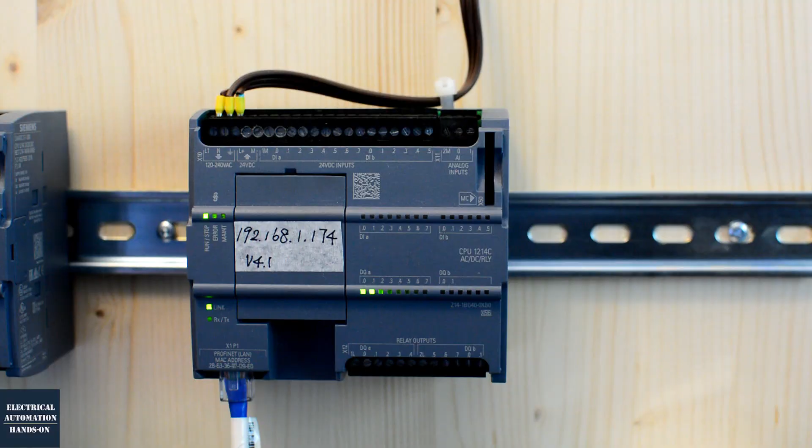In this video, I'm using the Siemens S7-1200, CPU 1214C AC/DC relay. This is a very commonly used controller, especially at the machine level. I will show how we can use this SD card to deliver the new program, so the end user, as a machine user, just needs to plug in this card so the new program can be delivered to the controller.

Let's first review the TIA Portal. Let's quickly review the current logic inside, and then I'll play the role of the machine builder, machine programmer, and add some features and transfer my program to the SD card. Then I'll mail this SD card to the machine user. As a machine user operator, he just needs to plug in this card, and I will show this procedure. Now let's go to the TIA Portal.

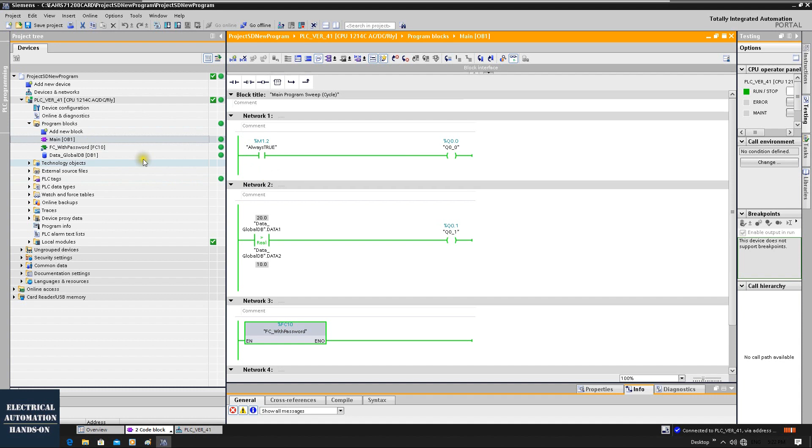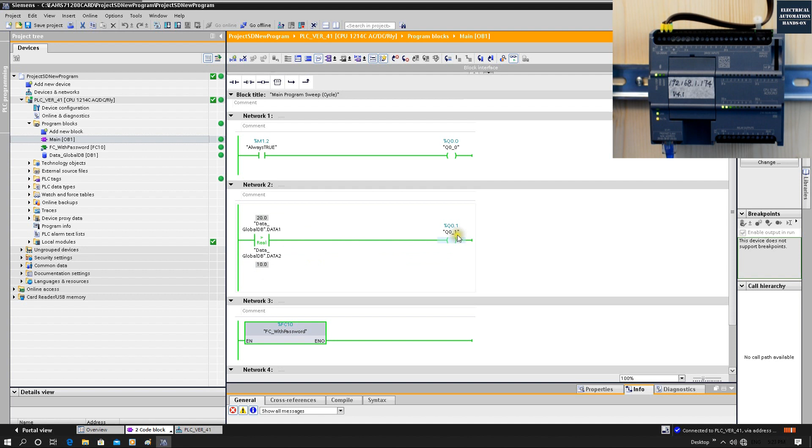Let's quickly review the existing program in this PLC now. In this program, I have two logic blocks. One controls the first output Q0.0, always on. The other logic controls the second output, Q0.1. Here there's a comparison logic: 20 greater than 10, which controls turning on Q0.1. These two data values come from the data DB.

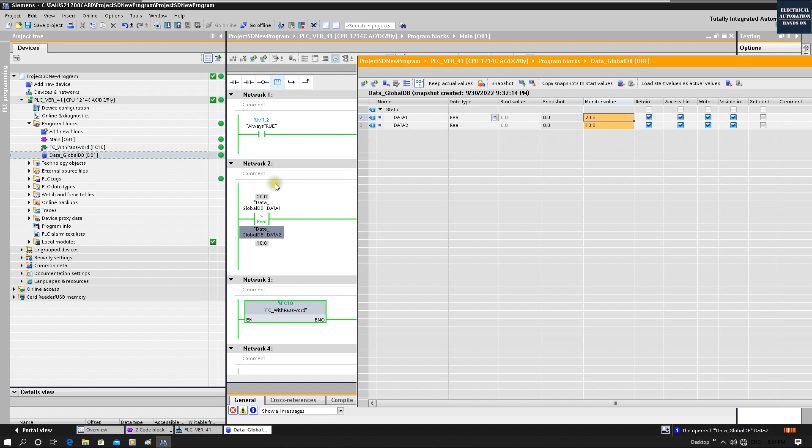Once we open this DB, we can see the current data. Data 1 is 20, and data 2 is 10. Both data are set to retain, so if I shut down the power, this data will not be lost because it's set to retain. Because of this comparison logic, the second output is on, which we can see from the camera. Also, this OB1 is calling an FC logic block, and this FC has a password.

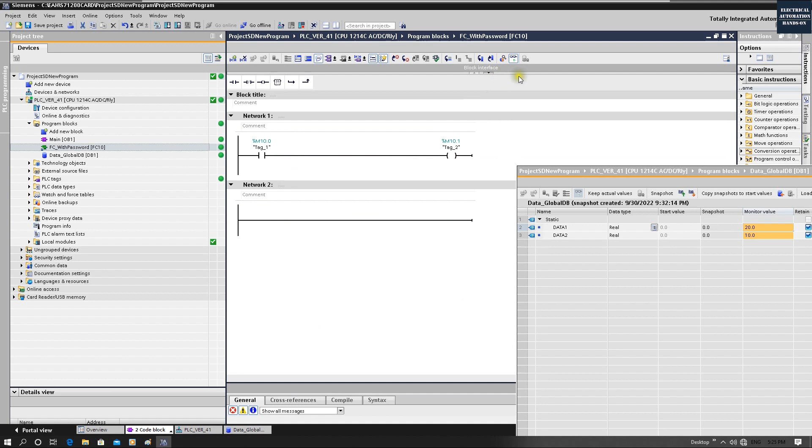I will explain later why I'm using this FC with a password. Now if I try to open this FC, it requires a password - my password is 1. Once I type in the password, we can jump into the program and go online. I believe this is a common case - usually in your program, some function block or function has a password, and the PLC has data along with some function or function block that's password protected.

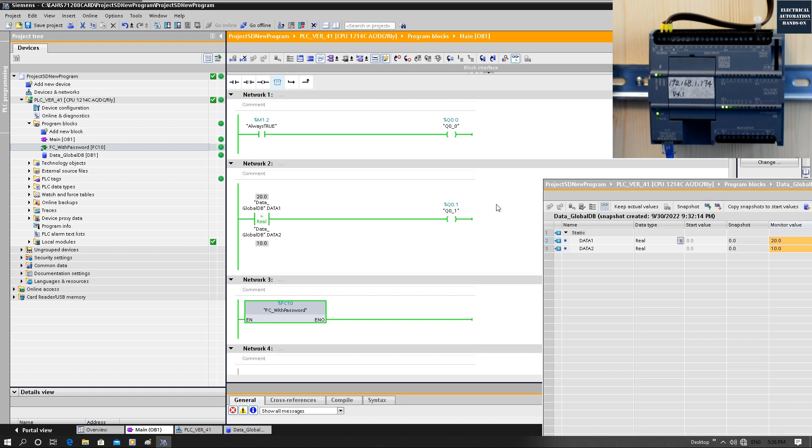Now let's go back to this case. The customer wants to add some logic or feature to this program. For example, I have the original program now, and I'm going to add some new features.

To use this card to deliver our program, a very important setting from the PLC CPU properties. We need to change one setting here. Double click the CPU and find out the startup.

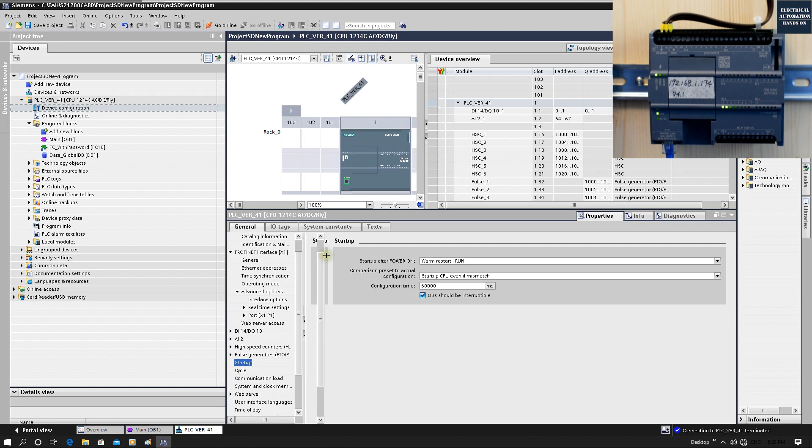The default setting is the warm restart mode before power off. To use the card to deliver the program, we need to select warm restart - RUN. By default this is the selection. That means if the CPU was on status, if we shut down the power, the CPU restarts, then it will return to the original, the previous status.

If it was run mode, after the restart it will go to the run mode. However, if by some reason the CPU was stopped, even if you cycle power, the CPU will not turn to run because it just goes to the mode before power off.

Before the power off, if the CPU was stopped, then your CPU is still at the stop mode. This will be a very annoying status, so your CPU will not be able to run unless you use your TIA portal to connect to the controller and turn on your controller.

Or you can use your automation tool, another software from Siemens, so you can connect to the controller and turn it on. We know the Siemens S7-1200 PLC doesn't have a switch. You can turn on the controller from the stop mode to the run mode.

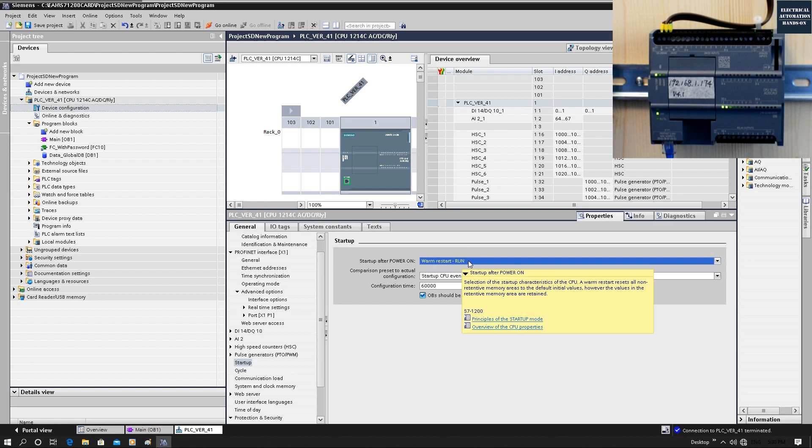This is slightly annoying. So to allow this CPU to force turn to the run mode, we need to select this mode, warm restart run. Keep in mind, you need to select this mode, warm restart run. Okay, and then let's go to the program.

Let me add some program. So the existing program, we have the data here. It turns on Q0.0 and turns on Q0.1. I'm going to add another program, say in the DB here.

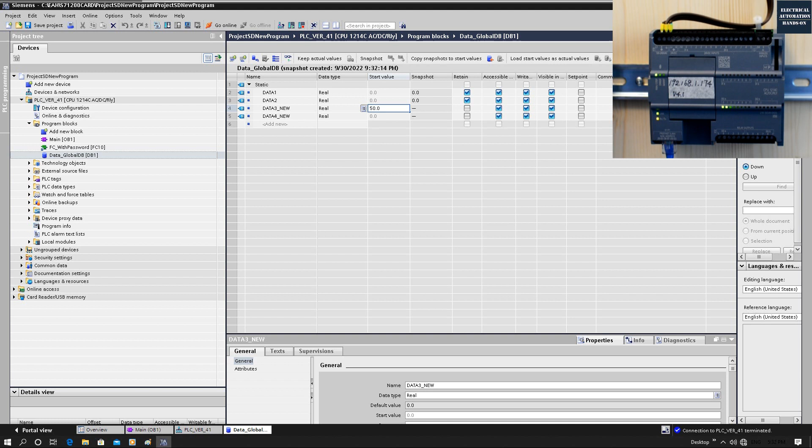I need to add some new feature. For example, I have the DB data 3. This is the new real, and the DB and data 4, this is also new. And their start data I can set 50 and 40. Also I can turn on the retain.

And from this logic I can also use the comparison, greater compare, if data 3 greater than data 4, then we can turn on Q0.7. And I can add a comment here. This is the new program.

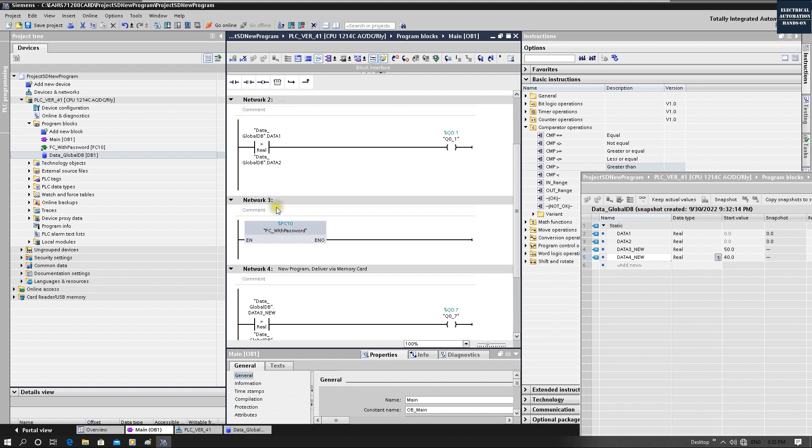This is the new program that needs to be delivered via the memory card. So I've added this program now. So how can we use the card to deliver this program?

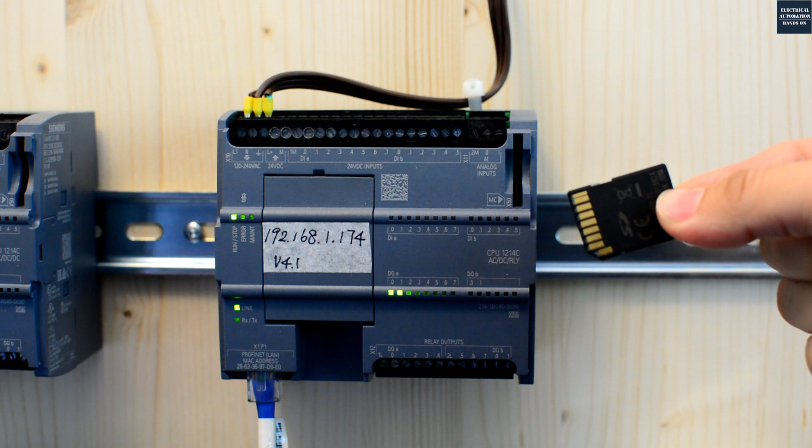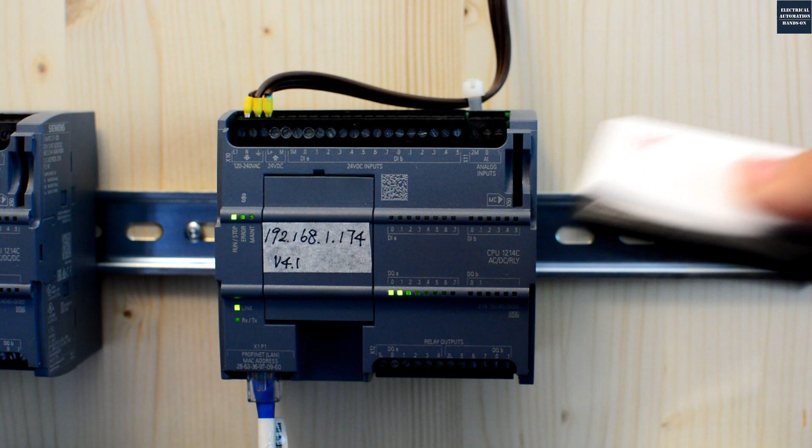This is a Siemens memory card. This is a very common style, quite similar to a camera or any other SD card. You can use this common SD card reader to read this memory card. Basically every laptop now has an SD card reader, you just need to plug it into your laptop.

And now I'm going to plug this card into my laptop, and we can use the TIA portal to transfer my program into this card. For example, this is my laptop. At the side of my laptop here it has this card reader, so I can plug in this Siemens card.

Once we plug in this memory card, from the Windows system we can see it finds this card, and the size is 4 MB. Even though the total shown is 32, the actual size for this memory card is 4 MB. This is enough for most cases for the S7-1200 PLC.

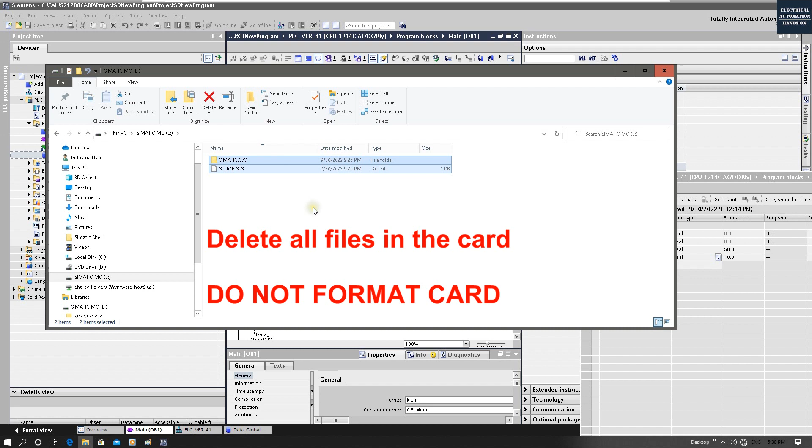So we double click into this memory card. Maybe in this memory card it has something inside, but it doesn't matter. The first thing we need to do is delete all the files in this card. Take care of this word - just need to delete, do not format this card. Just delete. So we select all the files, right click, and click delete.

As we know, the Siemens card has a special format. Once you click format, this card will be formatted to a very regular card, and then this card cannot be used as a Siemens card anymore. Be very careful with this. Also, turn off the display of hidden files - do not delete the hidden file, just delete the project file.

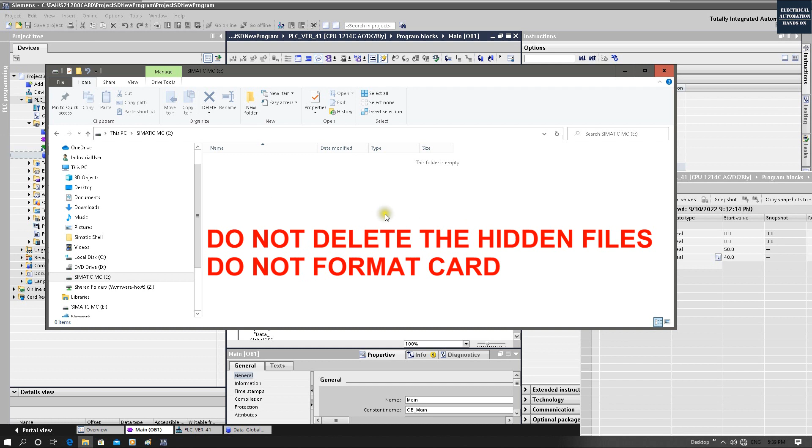And then from the TIA portal, from this left corner, we can expand this card reader here, and we will see this removable device show up, showing this SIMATIC MC. Once we delete all the files in this card, it will be set to an unknown mode. Then we need to manually set the memory card role for this card. Right click, click properties, and select this card type to transfer.

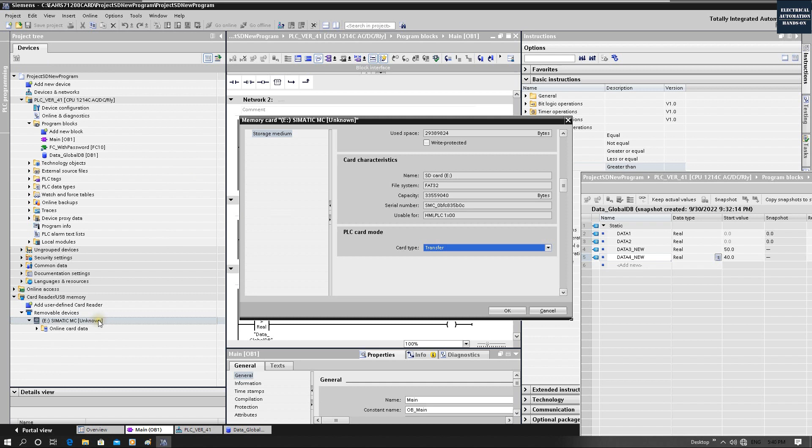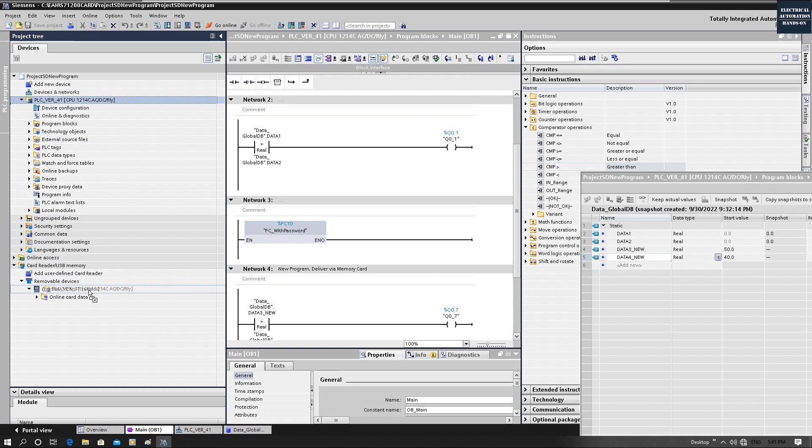Because we are going to use this card as a transfer card, we will copy our program to this card and mail this card to the customer. Click OK, and after selecting, we will see this role change to transfer. After this setting, we will click this entire project here and drag this project to the card, see this plus icon, and release. Okay, click download.

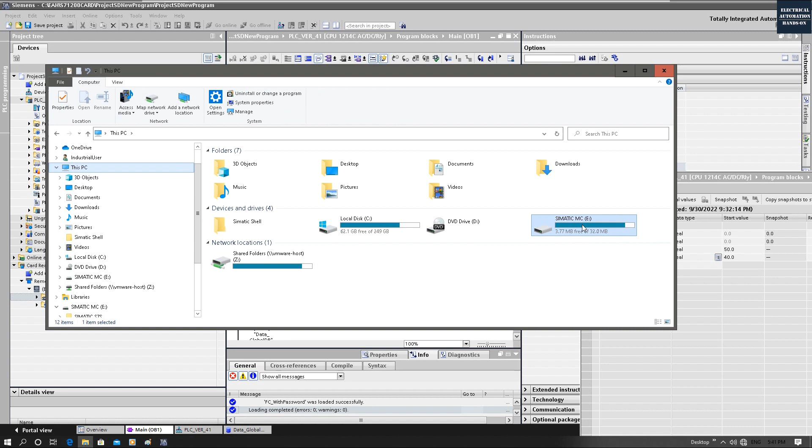Alright, now we transfer this project to this card. In the meantime, we can open this SIMATIC card, and we will see some S7 files transferred into this card.

Okay, now we can unplug this card and mail it. This card has the new program. We will mail this card to the customer. Now the end user, the machine operator or maintenance person, receives this card.

So we can insert this card into the controller. Before we insert this card, we need to shut down the power for this controller. Now let's shut down the power.

Okay, we shut down the power, and now I'm going to insert the card towards the top. There's a Siemens symbol here, so it's facing the left side, then let's insert. Make sure that it's plugged in. The surface is flat. Make sure the card is inserted correctly.

And now we can turn on the power. In the meantime, let's see the status of this controller. Okay, let's power up.

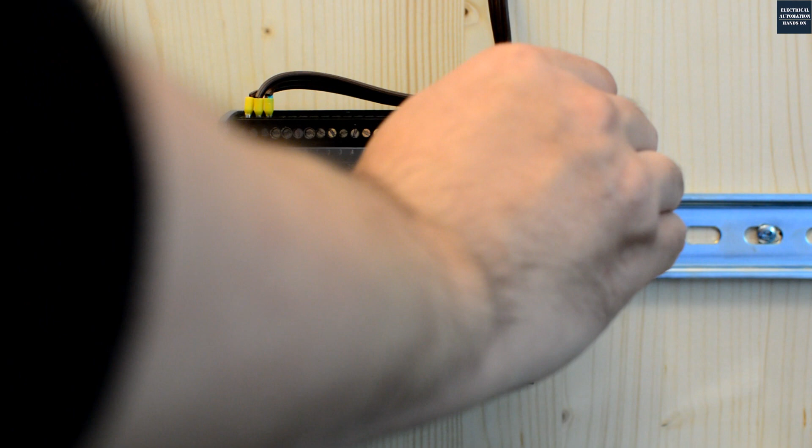Alright, once you see this stop indicator solid on and the maintenance indicator flashing, we can turn off the power. Okay, we turn off the power and then we need to unplug this card.

And now let's turn on the power. To verify if the new program was delivered to this controller, we will see this output Q0.7, which needs to be on.

Alright, so we will see Q0.7 turn on. That means the new program has been delivered to this controller. But in the meantime, you will see a little bit of a weird thing. If you compare the controller before we inserted this card, the second output, Q0.1, was on. But now that turns off. What happened? So let's go to the program.

Now I'm connecting this controller just for analysis, just to troubleshoot why this output turned off. This is a very important case I'd like to show. In a real case, this controller is working on site, and you're not able to connect to it. This is just to show this special case of why the second output, Q0.1, is not on.

So now let's go online. Firstly, we will see after I insert this card and turn on online mode, everywhere shows green. That means the new program was delivered to this CPU. My offline program and this on-site controller, they all match.

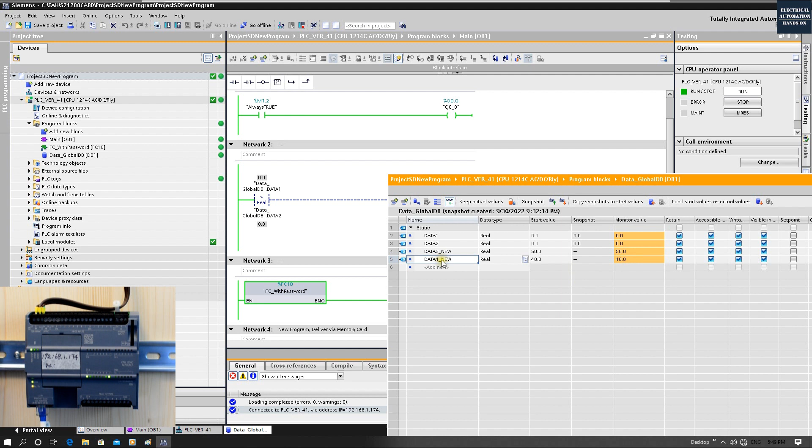And if we now turn on monitoring, we will see data 3 and data 4, this is new data. When I created these two data points, they had a start value, and once we download to this controller, they use 50 and 40 - this is the initial data.

But data 1 and data 2 were working on site, and maybe the customer was using the HMI, setting something already, setting this value to 20, setting this value to 10. So Q0.1 was on. But now, after we deliver this program, these two data get wiped to 0. That's because the start value is 0.

And another key reason: once we deliver this program, even though the value was retained in the PLC, it gets wiped out by this start value. You need to be very careful about this.

Okay, how can we deal with this case? From my personal experience, I would recommend that before you change your program or try to deliver the program using this memory card, you ask your customer to take some pictures from the HMI, or let you know some important values set for this project.

For example, basically all the important data set by the customer will be showing on the HMI, or allow the customer to set something. You could have some DBs store important data, maybe by the start value, the initial value, or maybe set via the on-site setting from the HMI. So you need to ask your customer to take some pictures from the HMI or directly tell you, for example, the PID parameters, temperature settings, some valve settings, or some speed settings. They need to tell you those values.

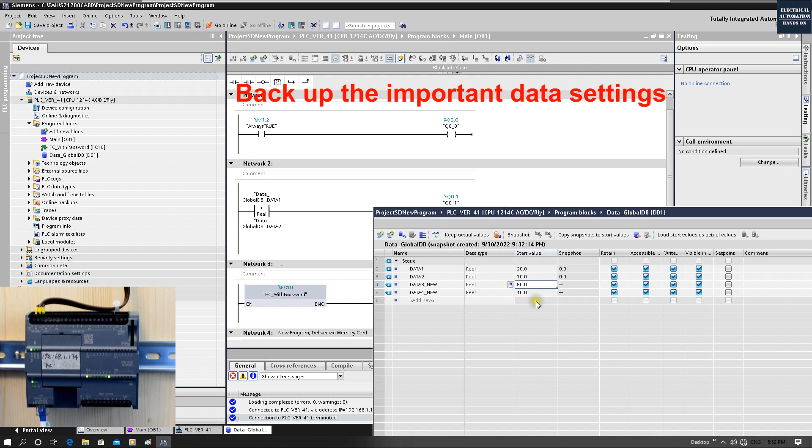And then from this offline, when you're doing the offline program, you need to set something. For example, okay, I know this value was 20, I know this value is 10. Okay, I set those values here as an initial value, as a start value.

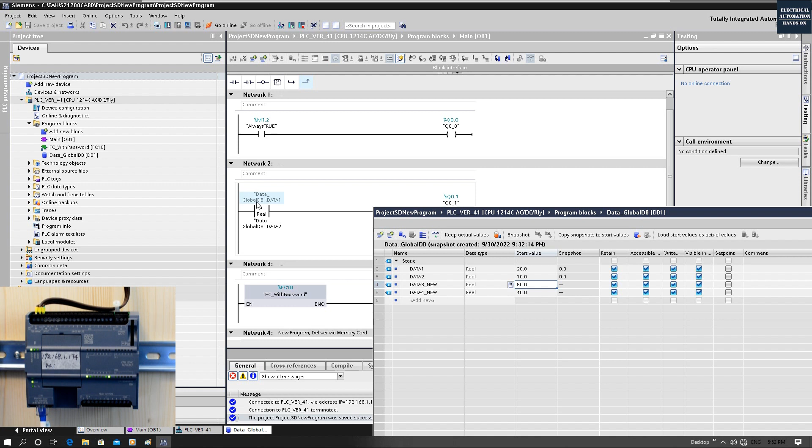Then once I transfer this program to the card and deliver this card to the customer, then once the CPU starts up, this start value will work. So basically this start value is used to initialize this DB. If we deliver the card and insert the card, it will override the real data for your on-site PLC. You need to be very careful in this operation. This is a very key reason I like to show in this video.

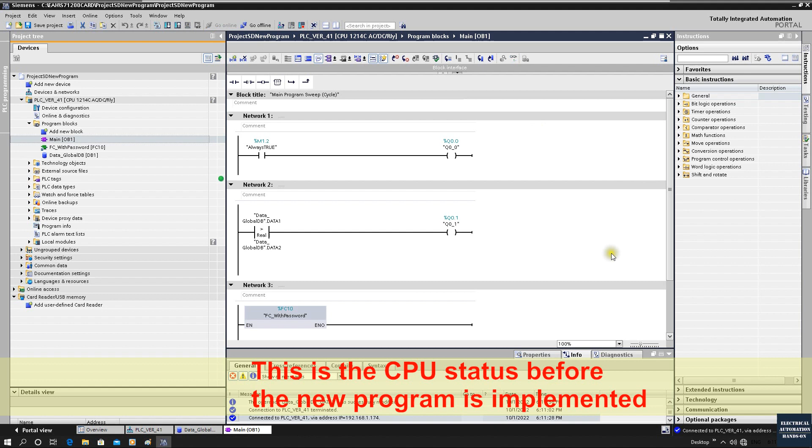Realizing this issue, now I will redo this procedure. Now I return this controller to the status before we download the new program. So now if I go online, in this DB it doesn't have data 3 or 4 new, it only has data 1 or 2. And the current DB value in this controller, that's 20 and 10.

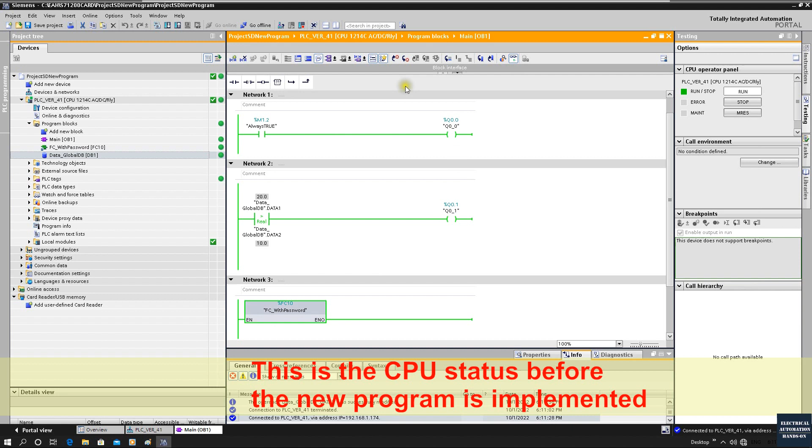And if I go online, as we can see now, the CPU, Q0.0 and Q0.1, is working. So this second output is on. And now I will do this procedure again.

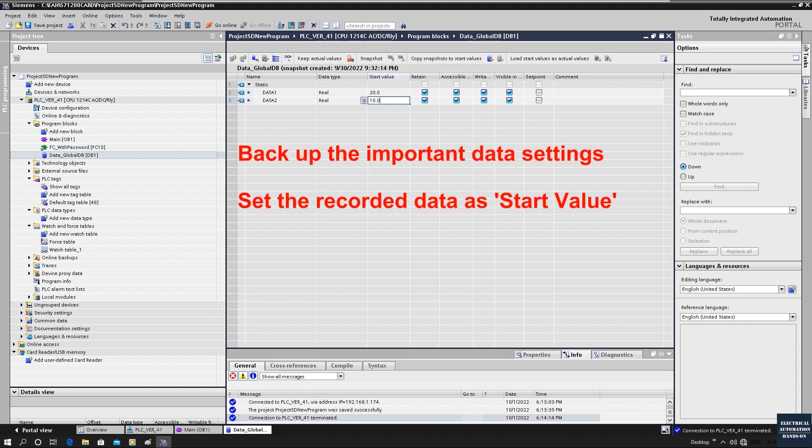Now I'm going to add the new program again. So first let's go to the DB. Before we add a new program, as I discussed, we need to ask the customer to record all the setting data. So in this case, I ask the customer, I know data 1 should be 20, and data 2 should be 10. Okay, I add the value here.

And then I will add the new data for the new program. For example, again, I will add 2 rows here, and name them data 3 new and data 4 new. Okay, and because this is the new data, I will write the start value. For example, this is 50 and this is 40.

And for the setting value, we will also turn on the retain, so once the controller cycles power, the data will not be lost. Okay, and then go to the OB1. I will add the same logic here, and paste the same program.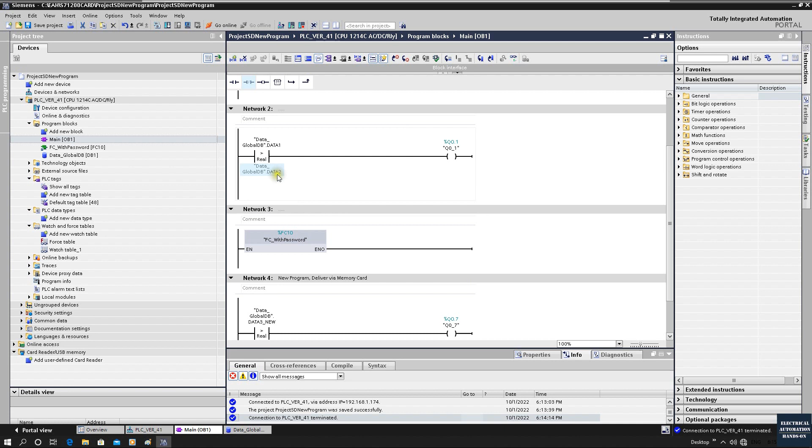So same thing: data 3, data 4. Once data 3 is greater than data 4, it will turn on the 0.7 output. And data 1, data 2, this time we have the initial data setting here, restored from on-site, asked from the customer. So this time the second Q should be on. Okay, save the project now, then compile, and we can copy this program to the memory card.

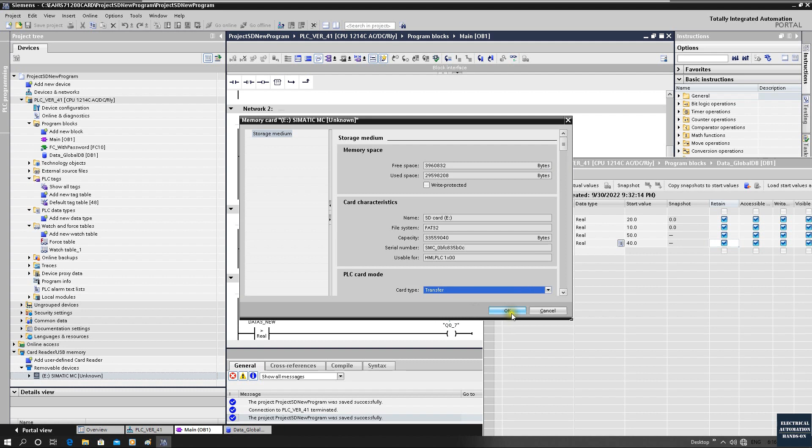Now I'm going to insert the Siemens memory card. Once the memory card pops up, we can delete the existing files in this card. Delete, and then we will see this card transfer to unknown mode. So let's go to the properties, set this card type to transfer. After this, we can compile this project, save this project, and transfer this project to the memory card. Load.

All right, this time this DB has this start value. Let me mail this card to the customer, and once they receive it, they can insert this card. This time we will see these two outputs—this is the controller working on site. As we can see, the first output and second output, this 0.1, that's on, because data 1 that's equal to 20 greater than 10, data 2. That's why the first output is on.

So now this end user received this card. This card has a new program, and also some data has the initial start value. Now I'm going to insert this card to this controller. But before inserting the card, shut down the power. Okay, we shut down the power, and then we insert the card toward the left side, and then let's insert—make sure you can hear this click—and then let's power up.

Okay, it's transferring the program. Once we see this start-stop indicator is solid, and this third indicator, the maintain, is flashing, that means transfer complete.

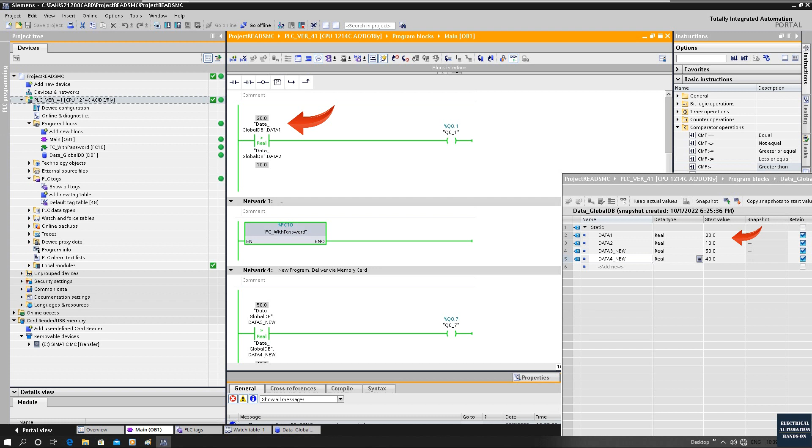We'll see data 1 and data 2 equal 20, greater than 10, and the new data is 50, greater than 40. That's why both outputs are on. So this is using the start value to restore the existing online running data. We need to ask the customer before we insert the card, before we prepare the offline program.

All right, let's shift to the next topic. If you have a higher revision controller, you bought a new one, can this memory card still fit for the new controller? Let's talk about this.

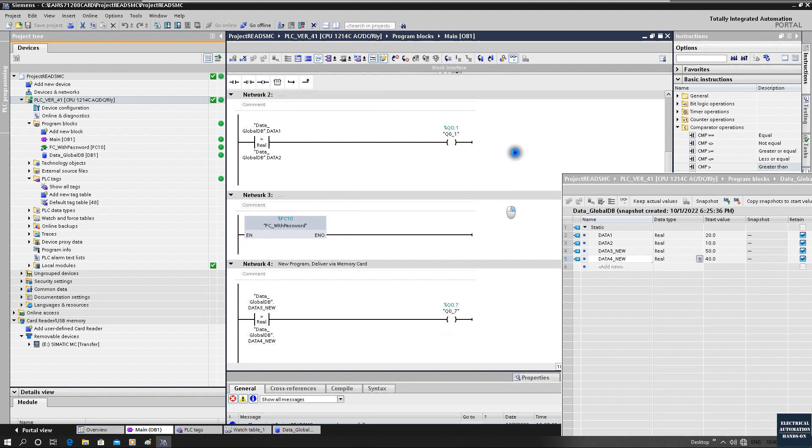As we can see here, on the left side, this CPU represents the controller running on site at the customer's side. Now, maybe for spare purposes, the customer bought a new controller. They ask that this new controller should have the new feature or the same function, but they don't have the program, so they ask you, as a machine builder, to deliver the program to their new controller. But as we know, this controller has an older revision, version 4.1.

But this newly purchased one has new firmware, version 4.5. So if our card still stores the old firmware configuration, but we insert this card directly into this new firmware CPU, can this new CPU directly use the card's existing old configuration?

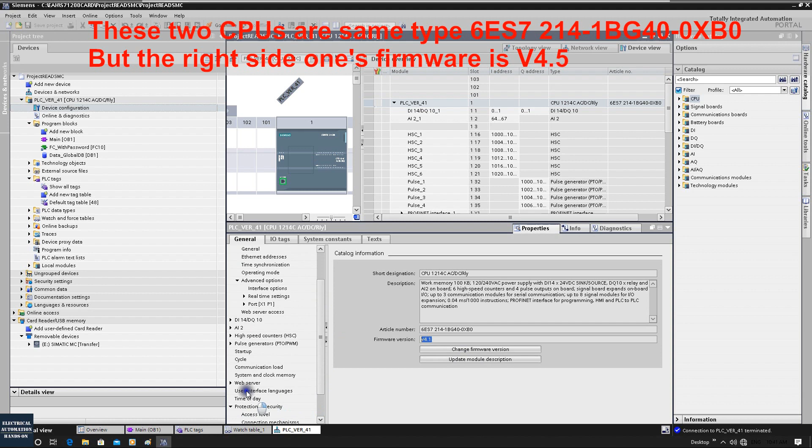Let's try this. First, make sure this selection still selects warm restart run, okay? And if we go to the catalog information, we'll see the offline hardware configuration is still 4.1. Meanwhile, this controller also has a password. If we go to this protection setting, we'll see it's set to no access, and I have a password for this controller. This is basically the common case for the machine builder.

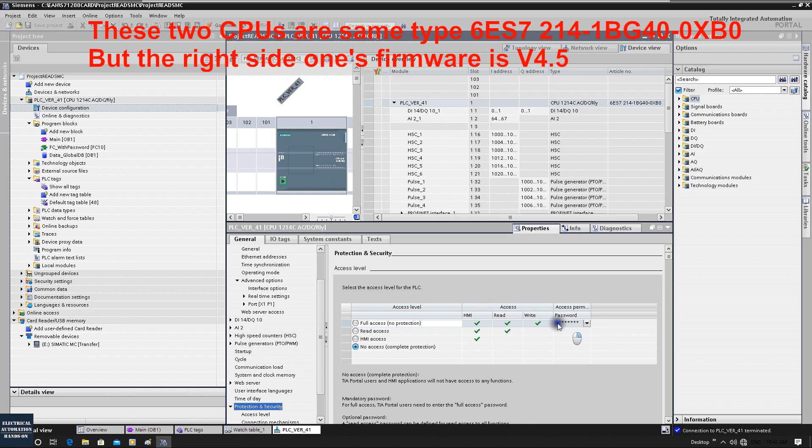Now if I copy my program to this card, the project includes the password, and even with a brand new controller, if I insert this card, it can download all those configurations with the password setting to this controller. Now let me transfer my project to this memory card. I'll drag it to the memory card. Okay, load.

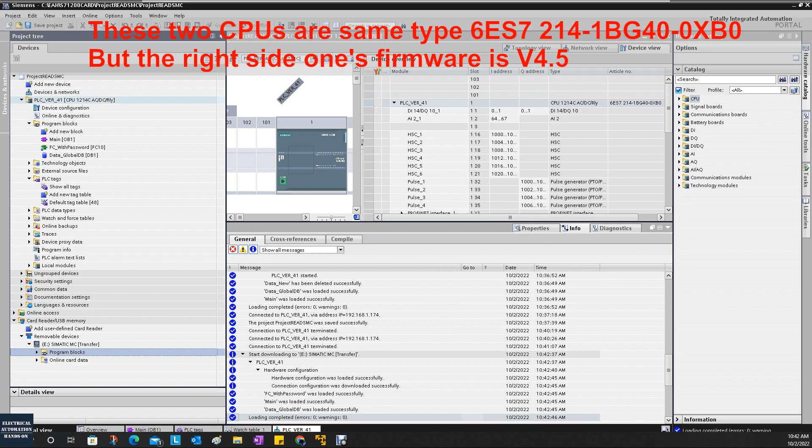All right, I'll unplug the card. Now if I insert this card into this controller, I open it and insert the card now. Let me power up. Once it powers up, if the logic is exactly the same, we should see the same output. Now I'm going to power up this controller.

Once we see this start/stop indicator turn on solid and the maintain indicator flashing, we can turn off the power. We turn off the power, and meanwhile, let's unplug this card. We unplug the card, and now let's power up again. We'll see once this controller powers up, the outputs are the same. That basically means all the logic belonging to this controller before was also copied and implemented into this CPU.

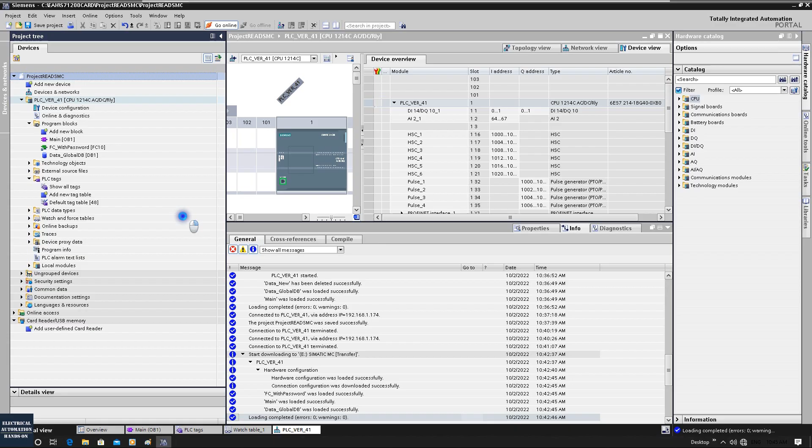Now I'm connecting this Ethernet cable to my laptop. We can go online, connect to this controller, and see if this program is totally downloaded, if it's exactly the same. Let's shift back to the TIA portal. I'm connecting to this right side CPU. As we can see, everywhere shows green.

If we go online, we'll see the actual firmware of this CPU is 4.5.2, because it's the new hardware firmware. But the offline configuration inside is actually 4.1. So if we go to the catalog here, it shows 4.1.

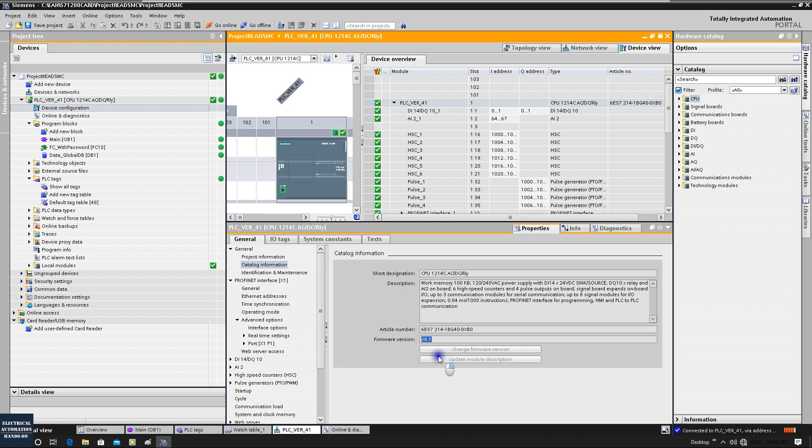That means using this card, we totally copy all the configuration to the right side, this new controller, and its IP address is also downloaded and implemented into this controller 1.174. If we go to this online access and browse,

we will see this controller, the IP address also implemented and downloaded to this controller. So using this card, even with a new controller, we can insert this card and the same logic or the updated logic can be downloaded and implemented to this new CPU.

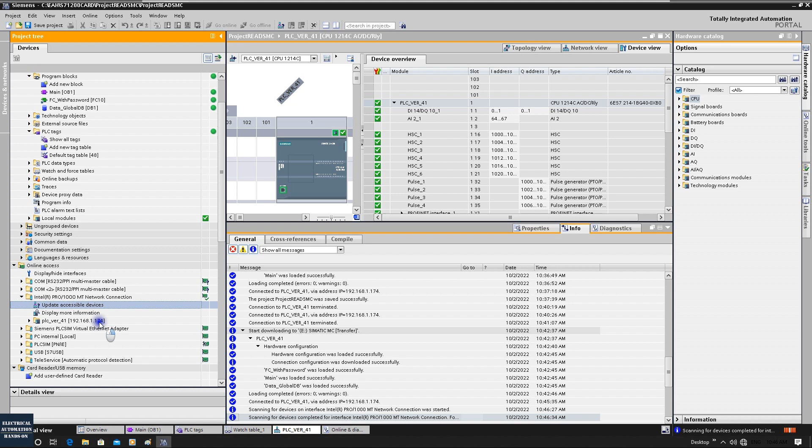This is the case for the new controller: we can insert the card, copy your program, or implement the new logic. So your existing controller can still be running, and then you can buy a new controller, insert the card, implement the new logic. So you have one backup version and a new version for your controller.

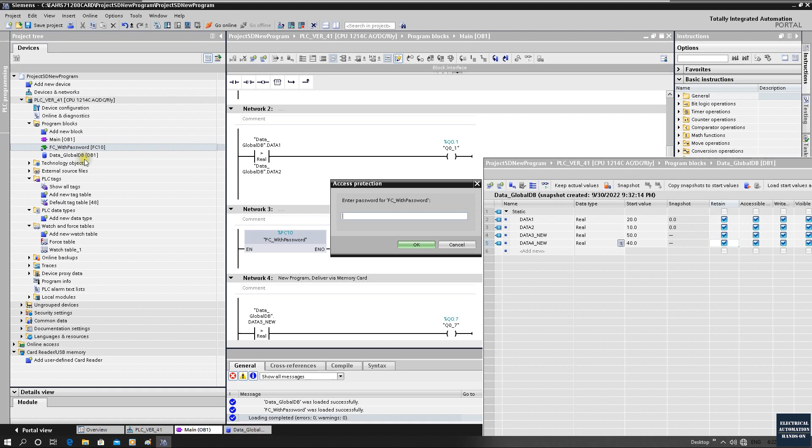Alright, the last thing I would like to show is why I have the function block with a password. As we can see, once I double click this function block, it has a password. To set that password, we go to the properties of this function block, and we can see this function block is protected.

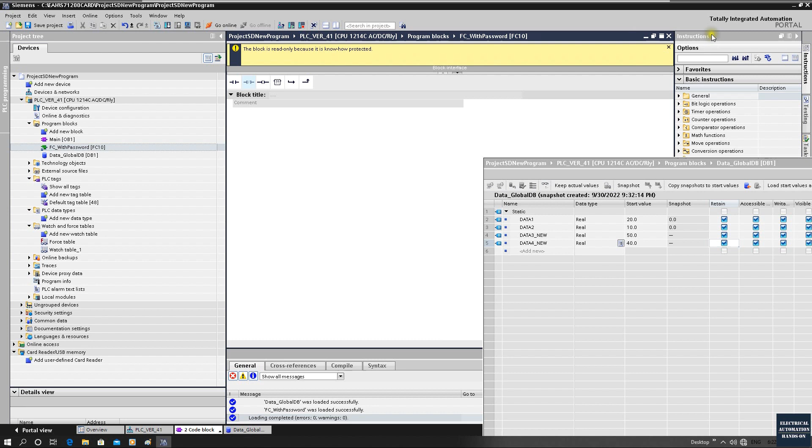To set the password for this function block, we right click, click properties, and click protection. This function is protected. For the OB1, if we try to protect it, we right click, click properties, and click protection, then set up the password.

Make sure you write down this password somewhere, because once you lose this password, you will forever be unable to open this function or function block anymore.

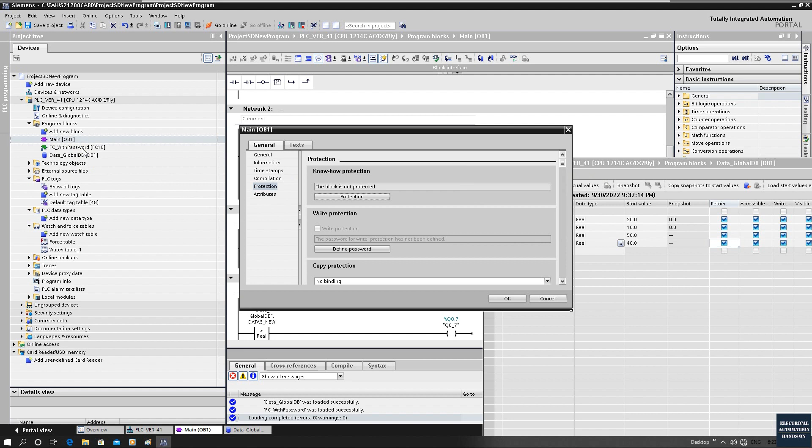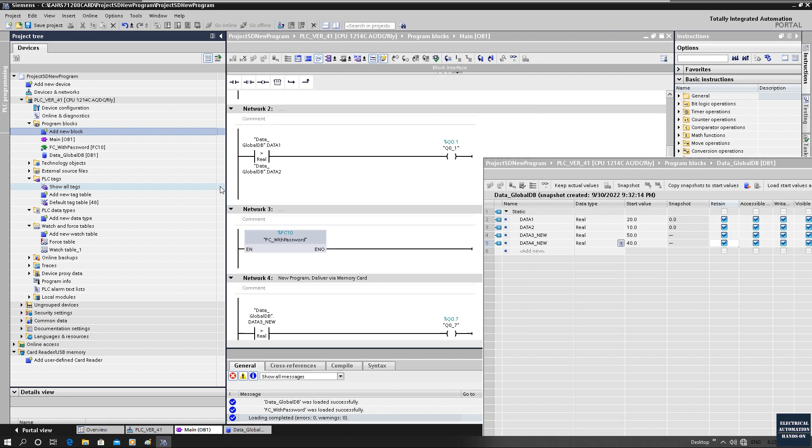Usually to protect your program, OB1, FC function, and function blocks are commonly set with a password, especially if you have some algorithms or important equations - you better protect them. The key reason I recommend setting some function or function block with a password, I'm going to explain this way.

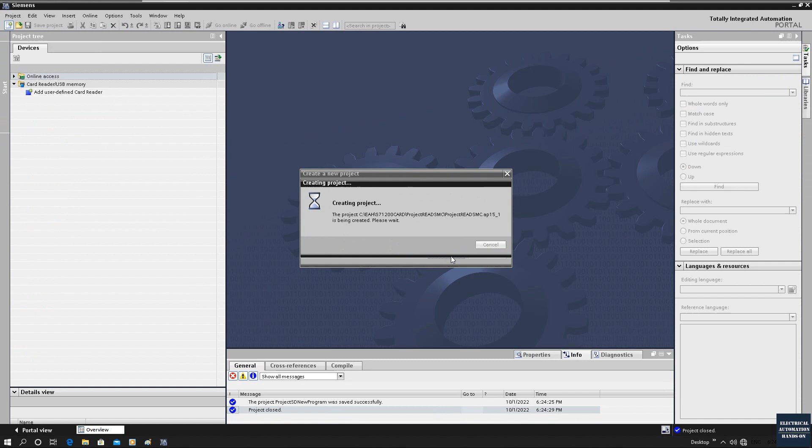The program on that card - as a user, they can actually open the project by reading this card. So now I'm going to demonstrate this. I'm going to close this project and open a new project, and in the meantime insert my memory card into my laptop.

We can see it has some project on this card. Once I open the TIA Portal, I'm opening a totally empty new project. We will see this card has something inside, and now I can copy this project from the card and drag it into my empty project. It's uploading.

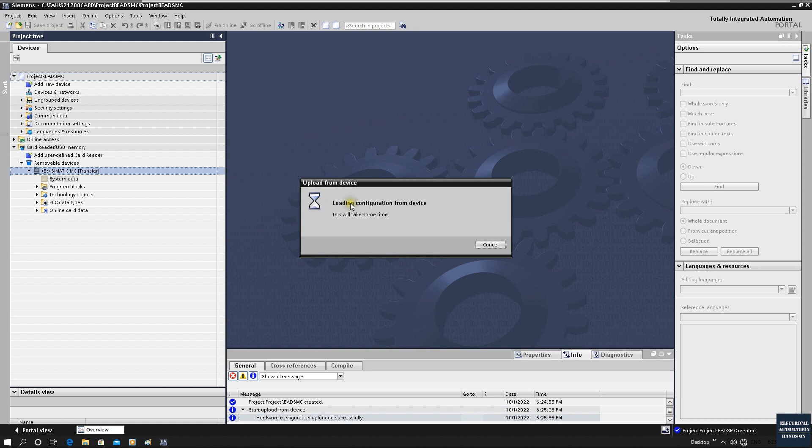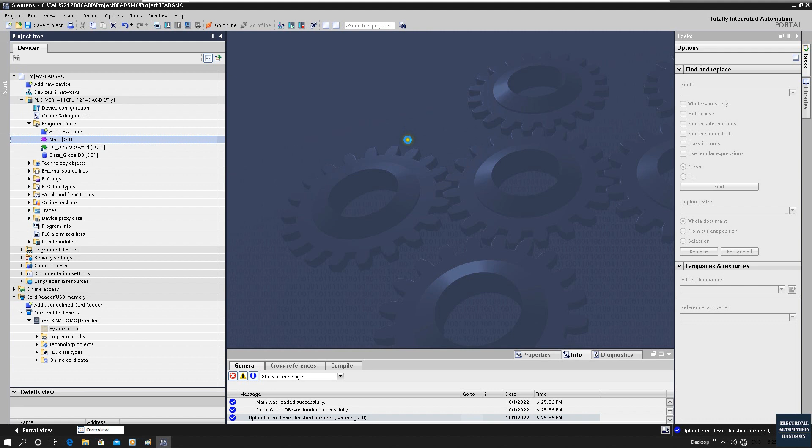As we can see, if you recall, when I downloaded my project to this card, it was exactly named PLC version 41. We will see all the settings, my OB1 commands, the logic and data - you can see all of them. Go to the DB and you will see all the data here.

So you can imagine if you are the machine builder or developer and you have important recipes or important settings in your program, and then the customer asks you to add some new feature - you add some feature and deliver the program to them.

So the one who has the memory card could open it and copy the memory card project to his laptop's TIA Portal project. So all your logic could be exposed - without any protection, your logic, algorithm, could be exposed to others.

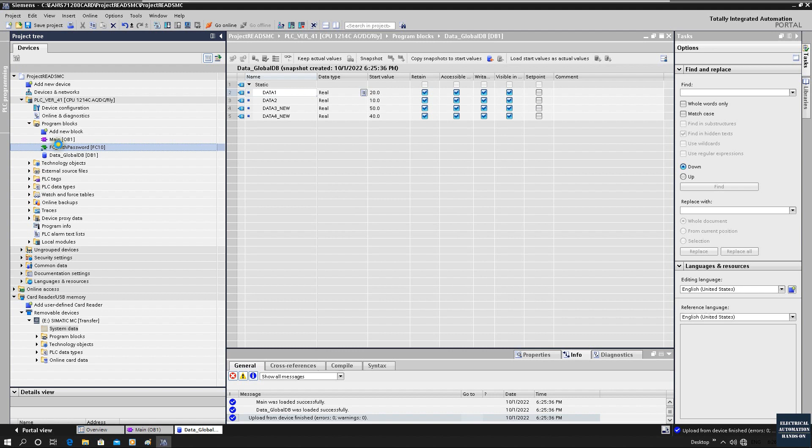But because now my FC has protection, if I open this FC, we will see it shows me it needs a password. So the user is not able to open this function, assuming this function includes some important equations inside. That's why I highly recommend, as a machine builder, if you have some program that needs protection, you need to set a password.

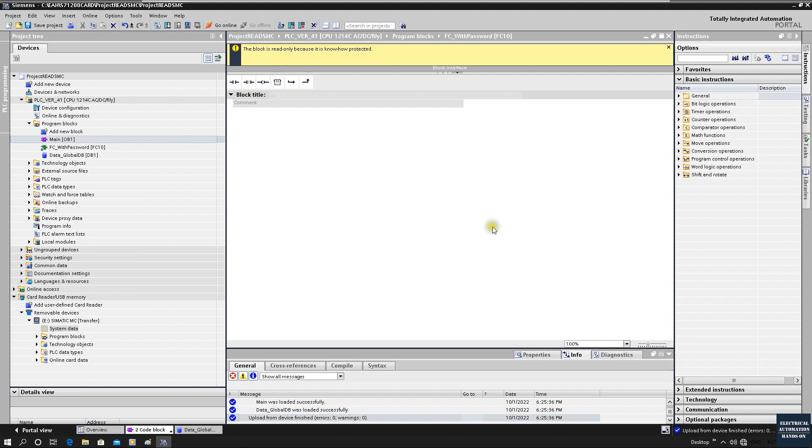Right click any program or OB, go to properties, go to protection, and set the password. In case your customer would ask you to transfer a program via the card or even use an automation tool, you could consider setting some important function block or function with a password to protect your intellectual property.

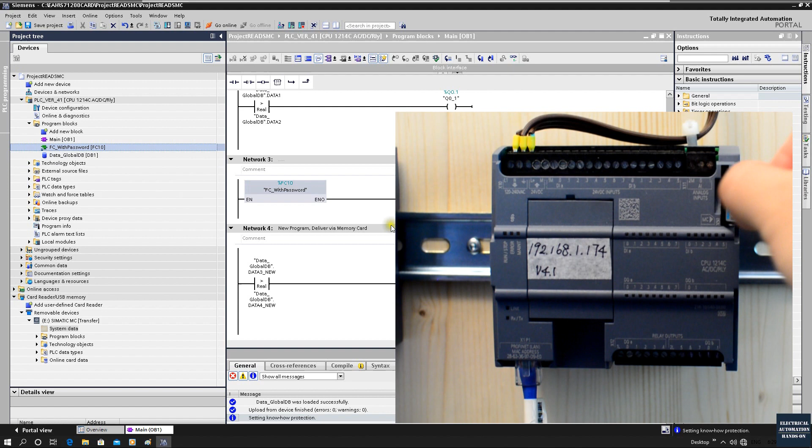Alright, this is the topic for using Siemens memory card to deliver the program. This is a very convenient way without any travel, so we can mail the card to the customer to update the PLC program. Alright, that's for today.